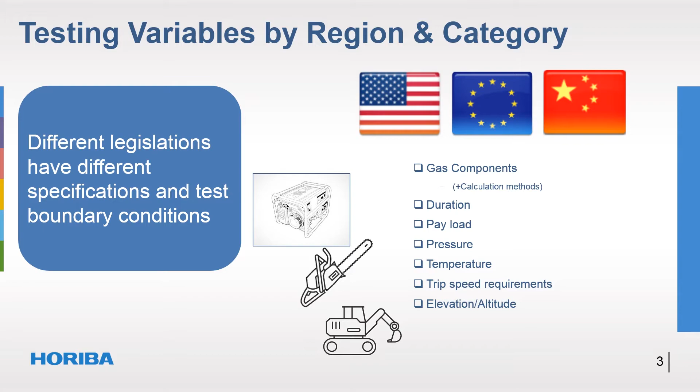In-service monitoring requirements vary from country to country and also from NRMM category to category, but is currently a requirement for the EU, USA and China, and India will be required from 2026. The test requirements and test parameters for each country depend on each country's specific conditions and legislation, as do the calculations.

For the EU Stage 5 regulations, many categories have been defined. These go from the smallest handheld equipment at less than 50cc all the way up to engines above 560 kilowatts for generator sets, inland water vessels and locomotives. Of these, currently only vehicles using engines rated between 56 to 130 kilowatts and from 130 to 560 kilowatts are required to be monitored in service, such as forklifts and excavators.

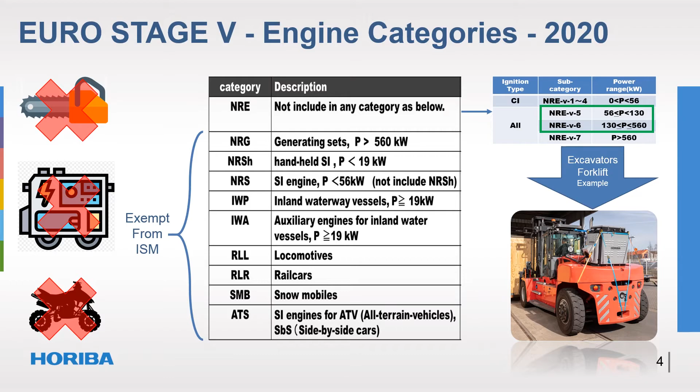The EU has already drafted the methods to perform in-service monitoring of engines below 56 kilowatts and above 560 kilowatts. There has been a delay in the legislation being published, but it is expected to become an EU directive by the end of 2020. It is expected that in-service monitoring will not be required for handheld devices with engines less than 50cc, such as chainsaws and strimmers.

For these, as an alternative, an engine test method will be applied to confirm their emissions over their expected lifetime.

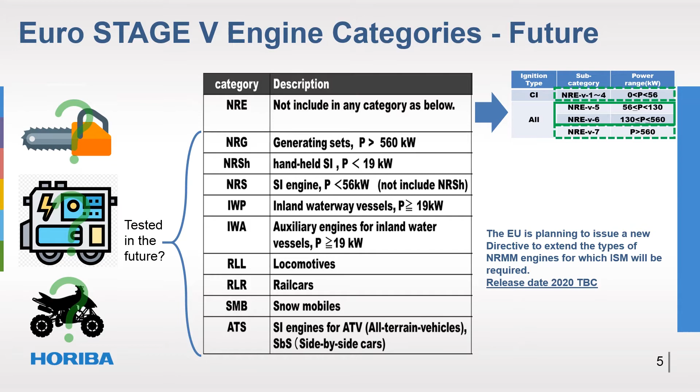There is a wide variation in the timing and scope for the in-service monitoring of non-road mobile machinery, but it is expected that more countries will introduce legislation during the next decade.

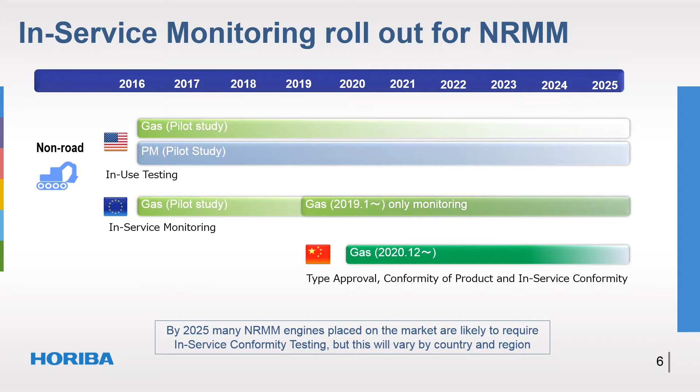Currently, only gaseous measurements are required for the EU, but it is expected that PN will be applied in further revisions in the same way that PN has been applied to light-duty and heavy-duty real-world emissions.

For the EU, the calculation and reporting of the emissions is based on the Moving Average Window, or MAW method, that is used for the heavy-duty on-road testing and also for the validation of the road trip for light-duty vehicles.

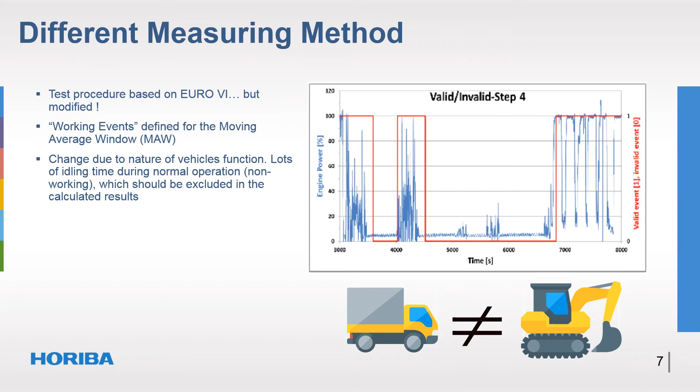However, the use of NRMMs is very different to other types of vehicle, and so the calculation has been modified to use data only from working events, principally to exclude measurements made during lengthy engine idle and for a certain time after the engine load is increased after those long periods of engine idle.

As previously mentioned, future EU legislation is expected to require in-service monitoring for a wide variety of applications for engines with a wide range of power outputs.

Such a wide range of applications and engine sizes means that a PEMS must be able to cope with a wide range of locations and positions for mounting, as well as a wide range of operating conditions, both in terms of the work activity and the working environment.

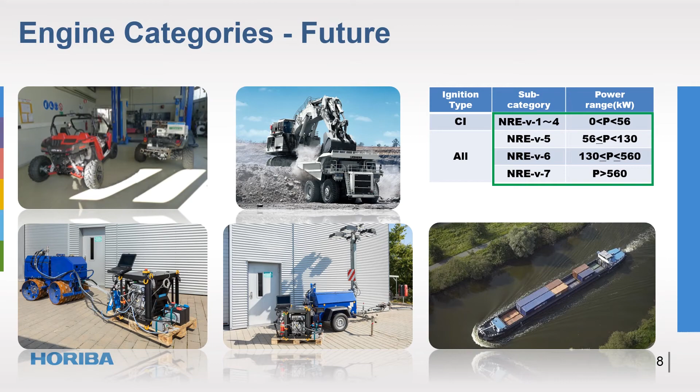To cope with these wide ranges of application and working conditions, HORIBA has developed a rugged enclosure module in which the OBS-ONE PEMS can be mounted. The enclosure can then be located on or close to the NRMM to suit its operation and conditions.

The enclosure is designed to minimize the effects of vibration and shock in the three vectors, and the springs can be changed for new applications or differing operating conditions.

The enclosure also protects the OBS-ONE from rain and dust, and temperature-sensitive fans provide a more stable internal operating temperature, all contributing to providing a safe environment for your sensitive PEMS measuring equipment.

Finally, the rugged enclosure also includes a Wi-Fi module, which allows the OBS-ONE to be operated and monitored remotely, thus relieving the NRMM driver or operator of the potential distraction and allowing them to concentrate on the work task.

The system can be powered by battery or by generator set, depending on the application and on the amount of time necessary to acquire a valid test.